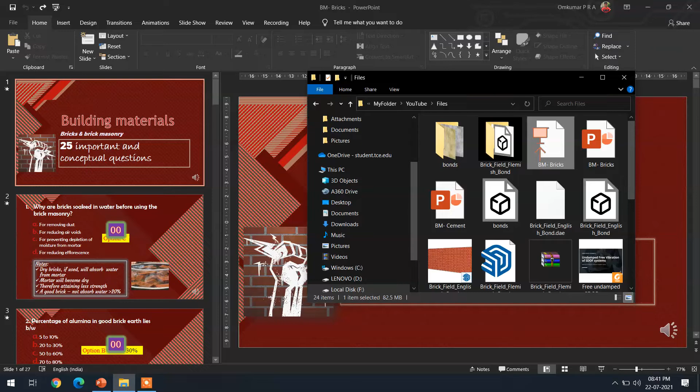Brick. Brick is a type of block that is used to build walls, pavements, and other elements in masonry construction. They are laid in courses or numerous patterns known as bonds, and collectively we call it brickwork. And they may be laid in various kinds of mortar like lime mortar, cement mortar, etc. to hold the bricks together to make a durable structure.

Now let's see some 25 important questions that will come under brick masonry, and those will be useful in various examinations. Now let's get into it. First question. Why are bricks soaked in water before using them in brick masonry? Usually the bricks are soaked in water for 24 hours. But why? What is the reason?

Our options are option A, for removing dust, option B, for reducing air voids, option C, for preventing depletion of moisture from mortar, option D, for reducing efflorescence. Just think for 10 seconds and give the correct answer.

Here we go. The correct option is option C. That is, for preventing depletion of moisture from mortar, we are soaking the bricks for about 24 hours before using them in brickwork or brick masonry work. Let's see some more points in this topic, efflorescence.

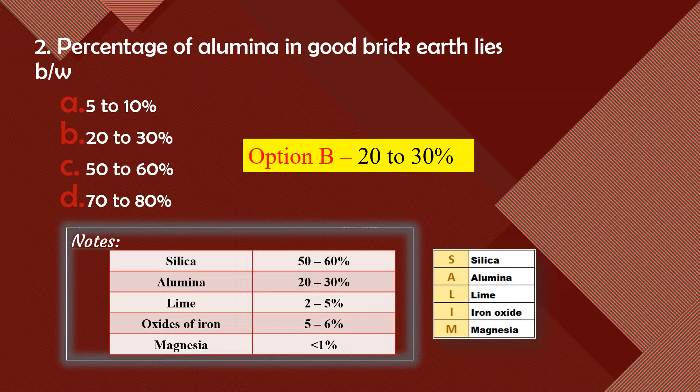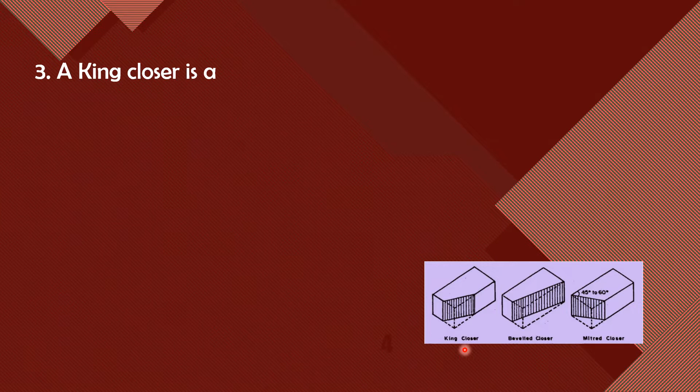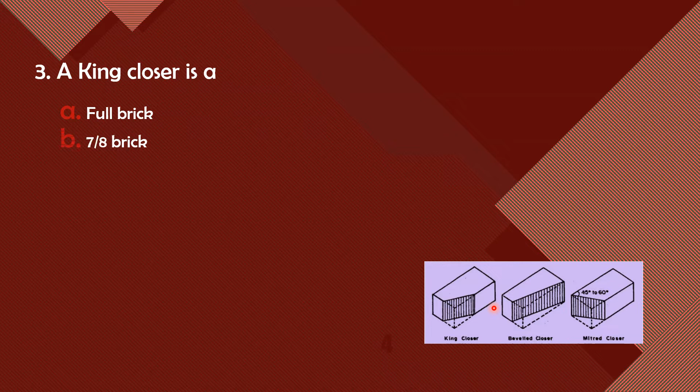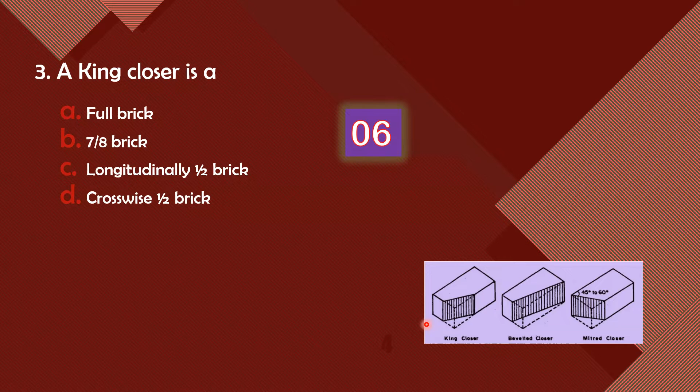The correct answer is option B, 7/8 of a brick. This is half of the header. This is half of the stretcher. If we remove this part, that will be around 1/8 of a brick. So how much is left? 7/8. A king closer is nothing but 7/8 of a brick.

Now let's see some more important points. A queen closer is nothing but a longitudinally half brick. So let's see the diagram. If this is the brick, what is the queen closure? It is the longitudinally half brick. And what is a half bat? This part is the half bat.

Others are mitered closer, bat, beveled closer. Here we can see the bevel closure. This is the mitered closure. This depends on the angle made with the stretcher end. So these are some of the closures we use in brick masonry or brickwork. Now let's move on to the fourth question.

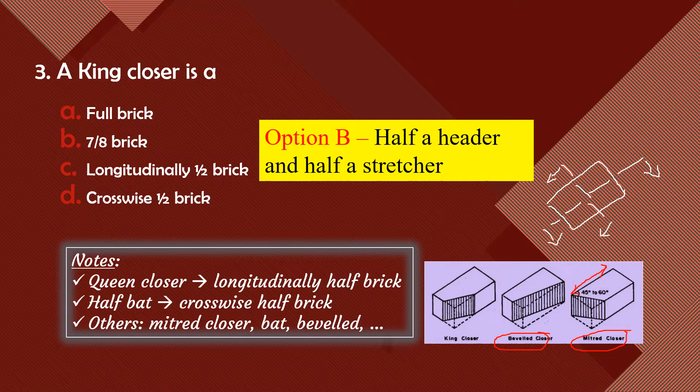At a T junction between a 1.5 brick wall and a one brick wall, one can use: option A, half queen closer in each course. What is the closure brick we have to use while using a T junction between a 1.5 brick wall and a one brick wall? Option B, half queen closer in every alternate course. Option C, 3/4 bat in each course. Option D, half bat in every alternate course.

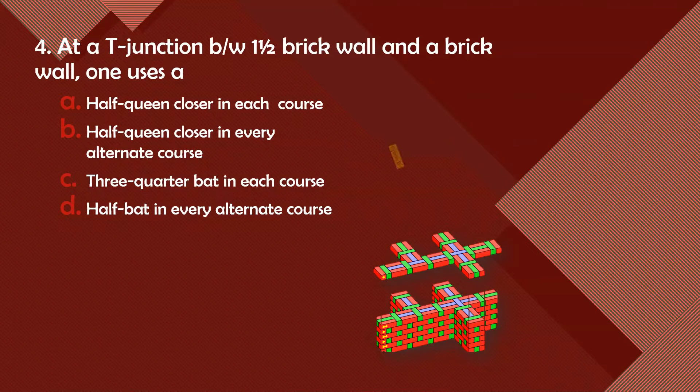We know what a half queen is, what a bat is, what a 3/4 bat is, and what a half bat is. Now guess the answer. Think for 10 seconds. Here we go. The correct option is option B, that is half queen closer in every alternate course. In every alternate course, that is this alternate one, this alternate one, this one. So for every alternate course, we have to use the queen closer. So this is the correct answer. Let's see some other points.

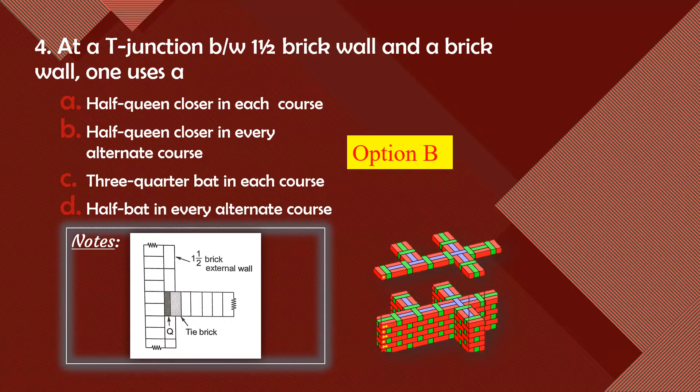Okay. Here is the diagram. You can visualize what is the half queen closer in every alternate course. So this is the half queen closer, and this is the T junction. This is the 1.5 brick wall, and this is the one brick wall. In a T junction between them, we are using a half queen closer in every alternate course. So this is how we can visualize it. Now let's move on to the fifth question.

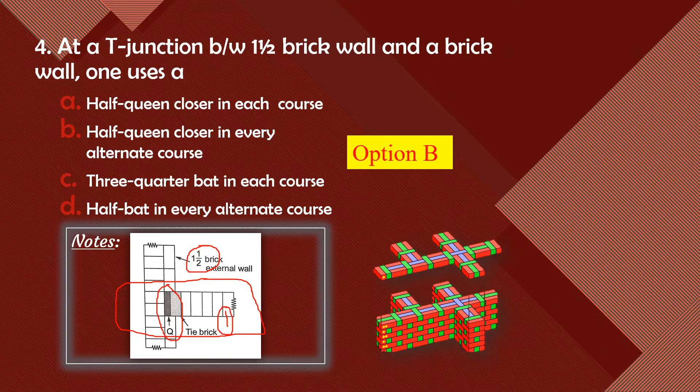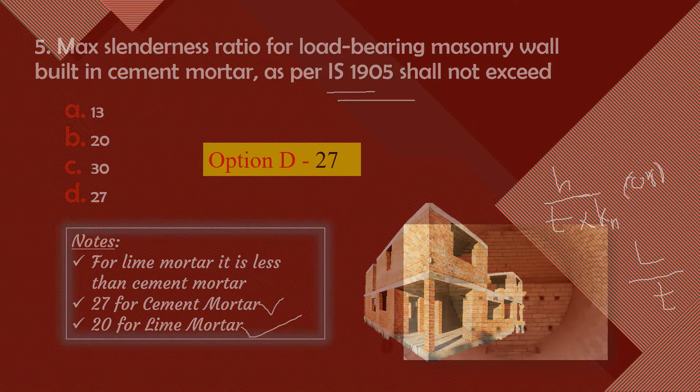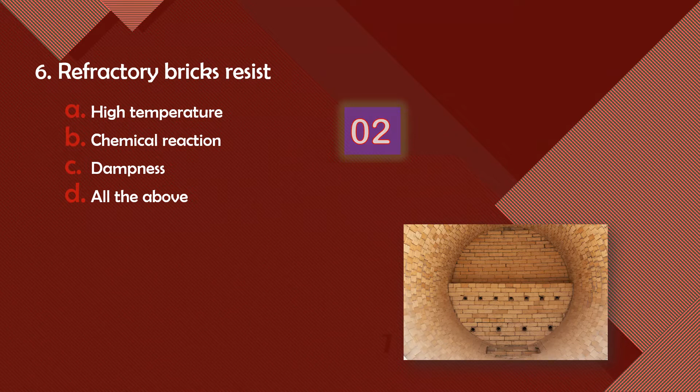Refractory bricks resist what? Option A high temperature, option B chemical reaction, option C dampness, option D all of the above. So what is a refractory brick? It is usually used in a kiln. Whenever a high amount of heat is there, we use refractory bricks. And what about chemical reaction and dampness? Just think about it for 10 seconds. What is the answer? The correct option is option D, all of the above. So refractory bricks can resist high temperature, chemical reaction, and dampness.

So we use refractory bricks in the lining of furnaces, where furnaces are subjected to very high temperature. Compressive strength of a refractory brick shall be 200 to 220 Newton per mm square, and the water absorption shall not be greater than 10%, around 5 to 10%, unlike ordinary brick. For ordinary brick it should be less than 20%, but for refractory bricks it shall be 5 to 10%.

Other types of refractory bricks are acid, basic, and neutral. So we are using three types of refractory bricks in the market. Chrome bricks resist the corrosive action of slags and gases; it is one type of refractory brick, useful to resist corrosive action of slags and gases. This is nothing but chrome bricks. Now let's see the seventh question.

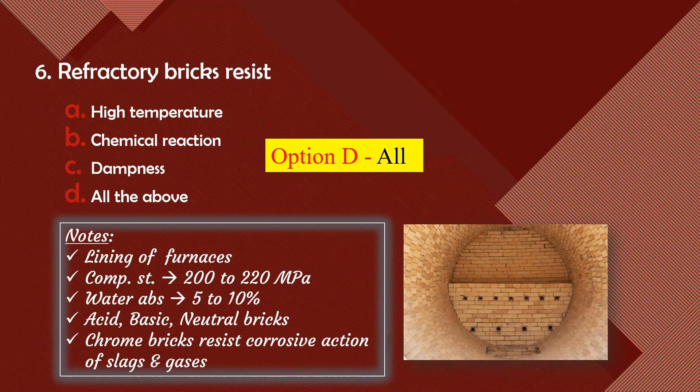In brick masonry, mortar strength should match brick strength, or mortar strength shall be greater than brick strength, or brick strength shall be greater than mortar strength, or it is independent of the strengths of both. Whichever is the answer. So what is the correct option?

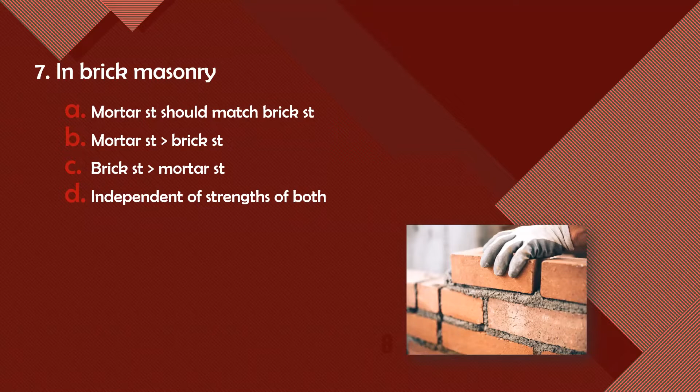The correct option is option A, equal strength. Why? Because it is ambiguous if we use mortar strength greater than brick strength or brick strength greater than mortar strength. There is no meaning of using variable strength; it should be optimum. That is, mortar strength shall be equal to brick strength. So both the strengths should be equal.

Units crush earlier than mortar. Whenever we use mortar strength greater than brick strength, the units of brick will crush earlier than mortar. Weak mortar means it will be a waste of money, because brick strength is already high, and if we use weak mortar, that will be a waste of money. So therefore, optimum strength, that is equal strength, has to be maintained in brick masonry. Now let's move on to the eighth question.

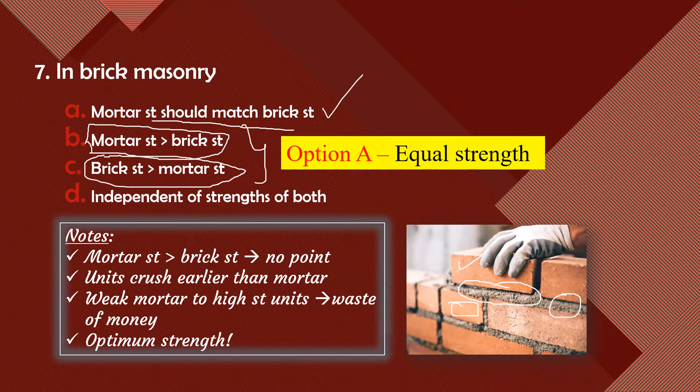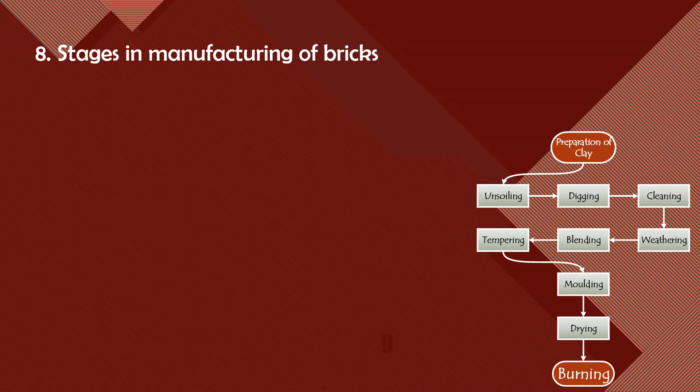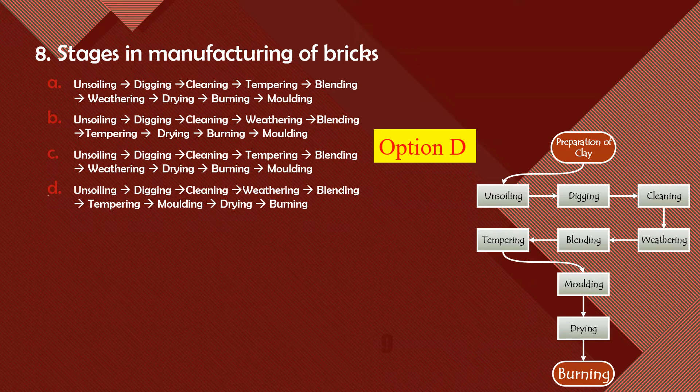Option D: unsoiling, digging, cleaning, and then weathering, blending, tempering, molding, drying. At the last, we have to burn. So you can refer to this flowchart as well. So what is the preliminary thing before preparing this brick? Topsoil of about 200 has to be removed because topsoil has some impurities. So we have to remove it for about 200 deep.

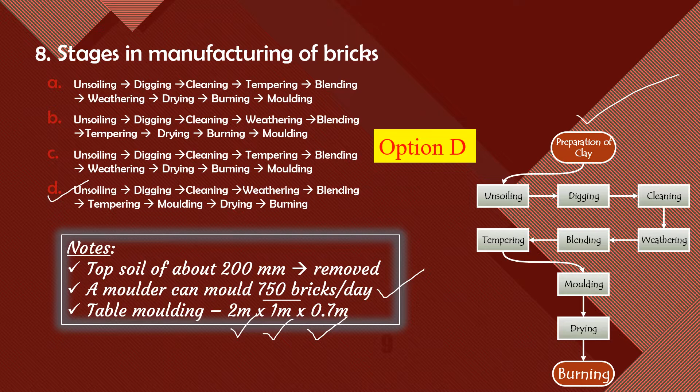A molder can mold 750 bricks per day. It is a general thing. In table molding, the size of the table is 2 meter across, 1 meter across, 0.7 meter. These are some general things we have to be aware of. So topsoil of about 200 has to be removed, a molder can mold 750 bricks per day, and table molding size is this. So these are the manufacturing stages involved in brick manufacture. Now let's move on to the ninth one.

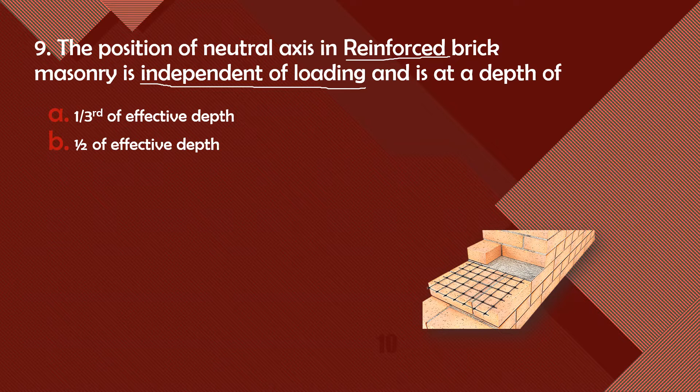The position of the neutral axis in reinforced brick masonry is independent of loading and is at a depth of. So the neutral axis position is independent of loading. They have given some information and we are supposed to answer the position of that neutral axis. Option A, 1/3 of effective depth, or half of effective depth, or full depth, or 0.707 times the effective depth. What is 0.707? It's nothing but 1 by root 2. So give the correct option.

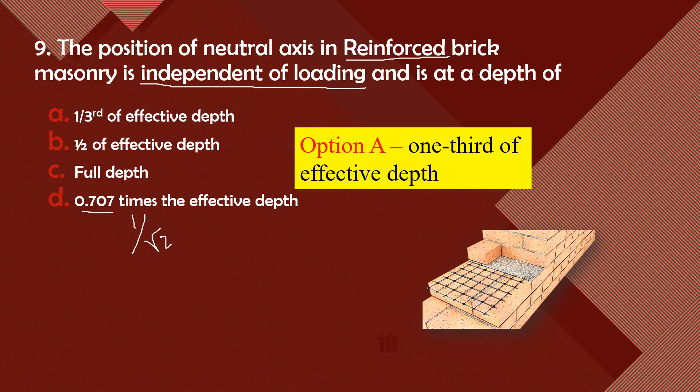The correct option is option A, that is 1/3 of the effective depth. What are the other things we have to learn? It should be capable of resisting compressive, shear as well as tensile stresses. For reinforced brickwork, it should resist both compressive stress and tensile stress because we are inducing steel between the brickwork. So it is expected to resist compression and tension.

Mortar cover of 15 centimeter to 25 centimeter shall be used. These are some provisions we have to adopt so that reinforced brick masonry is fully constructed. Reinforced brick masonry is cheaper than reinforced cement concrete, so it is cheaper than RCC. Higher ductility and stiffness, which is obvious because we are using steel as reinforcement. To achieve unusual shapes and bold patterns, we use reinforced brick masonry. Unusual shapes and bold patterns refers to ornamental or any shape we can achieve.

A plaster of minimum thickness 15 mm. So mortar thickness 15 centimeter to 25 centimeter, and plaster thickness shall be minimum 15 mm when using reinforced brick masonry, to avoid corrosion. Now let's move on to the 10th one.

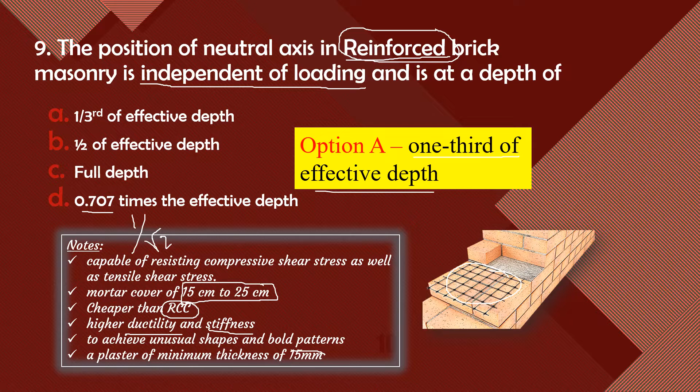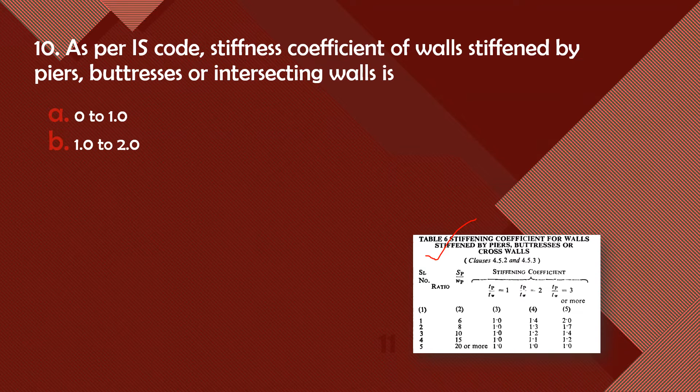10th question. As per IS code, the stiffness coefficient of walls stiffened by piers, buttresses or intersecting walls is. This is the table we can find in the IS code, and the question is based on this table. Refer to this table and give the correct option. Option A 0 to 1, option B 1 to 2, option C greater than 2, option D invariably 1.

So the correct option is option B, 1 to 2, because you can see here. So here is the 1, and maximum value 2 is here. So the stiffness coefficient of walls stiffened by these piers, buttresses or intersecting walls ranges from 1 to 2.

Now let's see some other important points. Stiffness coefficient depends on the ratio of center to center spacing of intersecting wall and pier width in the direction of wall. So this is how stiffness coefficient will vary. It also depends on ratio of thickness of pier to actual thickness of wall proper.

So what is the thickness of pier? It is denoted by TP. TP here. Here they have mentioned TP, and thickness of wall is TW. SP is the center to center spacing, and WP is pier width. Pier width we have seen here. So this is how stiffness coefficient varies. It ranges from 1 to 2. Now let's move on to the 11th question.

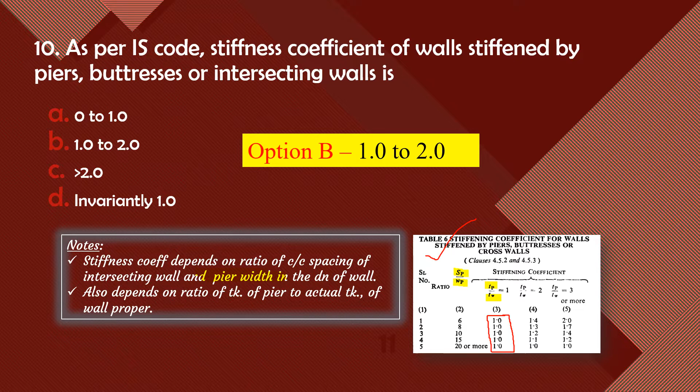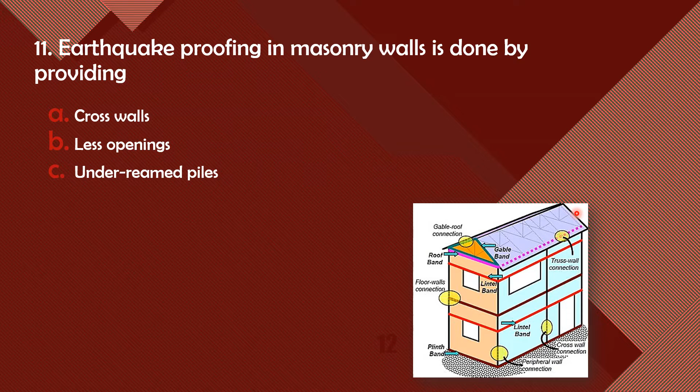Earthquake proofing in masonry walls is done by providing. So how are we providing earthquake proofing in a masonry wall? In this diagram, it's clearly mentioned how we have provided earthquake proofing in a masonry building. Option A, cross walls. Option B, less openings. Option C, by providing underreamed piles. Option D, by providing a steel band at corners above windows below ceiling. So refer to this diagram, you can get the answer.

So the option is D. You can see here, this is the lintel band. They have clearly mentioned here. So this is one of the steel bands that we provide to resist earthquake or lateral loads. We can provide shear wall as well to resist earthquake loadings, and a horizontal runner called band, that is the steel band at corners above the windows below the ceiling. We can consider this as a window, and this steel band, the lintel band, is constructed above this window but below the ceiling.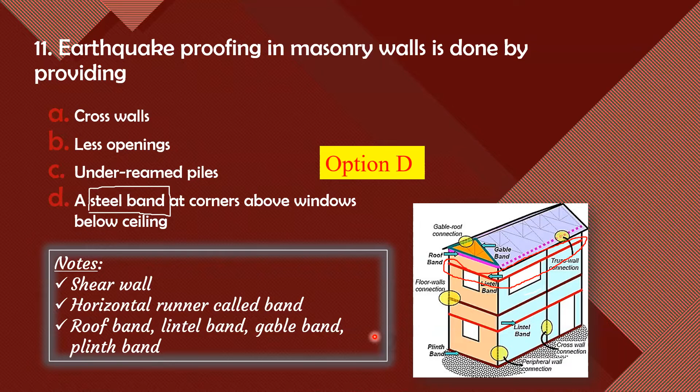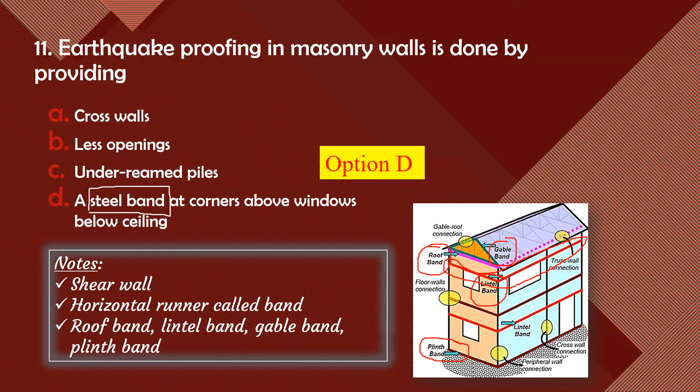And some other types of steel band are roof band and lintel band. Here you can see the roof band as well. This is the lintel band. This is the gable band. And plinth band near the plinth wall. So this is how we can tie up a building to resist earthquake loading, or we can say lateral loadings. Now let's move on to the 12th question.

The 12th question is, which type of brick masonry bond is provided for heavy loads in masonry? There are many types of bonds like English bond, Flemish bond, double Flemish, single Flemish, and so on. Which is that bond to take care of heavy loads? Option A, English bond. Option B, zigzag bond. Option C, single Flemish. Option D, double Flemish. Your time starts now.

So the correct answer is English bond. English bond is the one which is used to resist heavy loads. And we can see the functions of other types of bonds. English is the strongest bond. Double Flemish is used for aesthetic appearance.

Single Flemish strength will be the same as that of English bond, and appearance shall be the same as that of double Flemish bond. So with single Flemish bond we can achieve two things. But the strongest is the English bond; we cannot say single Flemish bond is the strongest one. Zigzag bonding is used for ornamental panels in brick flooring. Now let's move on to the 13th one.

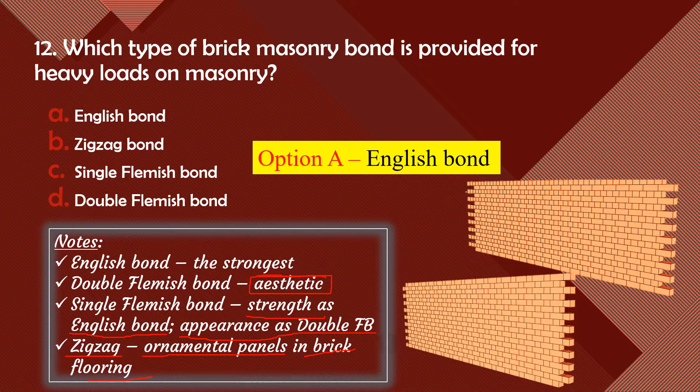When the deposit of efflorescence is greater than 10 percent but less than 50 percent of the exposed area of the brick, then it can be said as: option A, moderate, option B, heavy, option C, slight, option D, serious. What can we name that range of efflorescence?

So the answer is moderate. If the efflorescence deposit lies between 10 percent and 50 percent, we can call that efflorescence moderate. So when can we say an efflorescence is slight or heavy or serious? Let's see. We can say an efflorescence deposit is slight when it is less than 10 percent. We can say heavy or high when it is greater than 50 percent, and serious when greater than 50 percent and it causes powdering or flaking of the exposed surface.

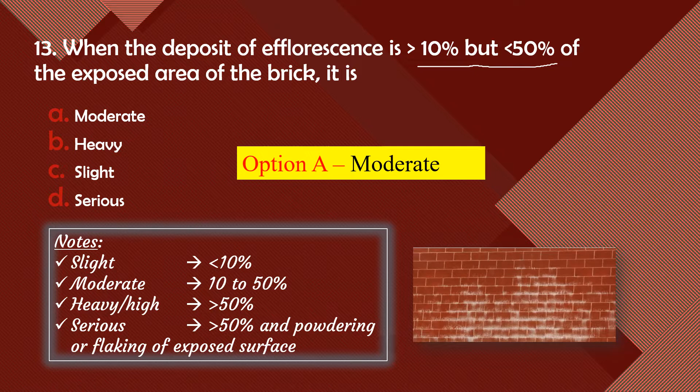The function of coping is to serve as a... So this is the coping. You can see here. So what function is it serving? Option A, ornamental courses between lintel level and roof level. Option B, projection from a wall to support a structural member. Option C, covering to wall to drain water. Option D, shade against sun or solar radiation. What is the correct option? What is the correct function which the coping is serving?

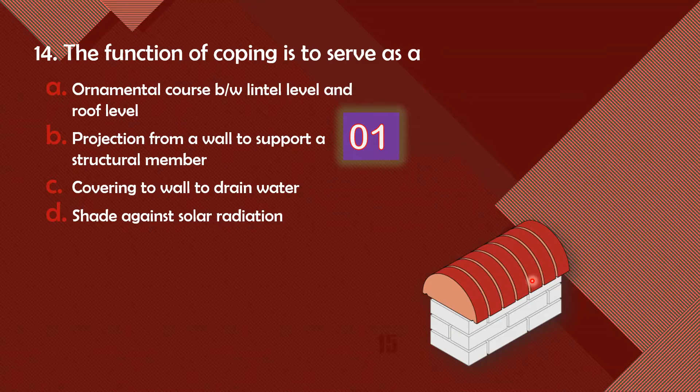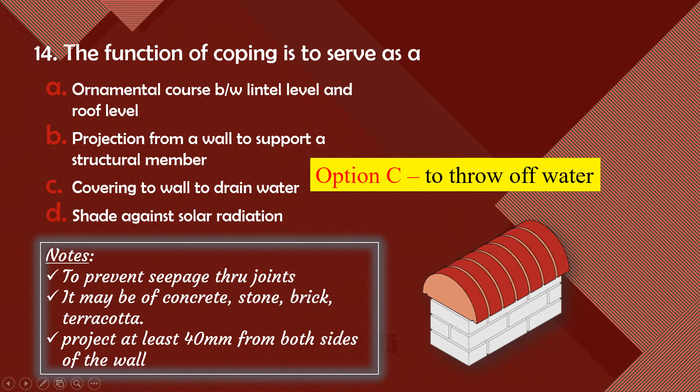Here we go. The correct option is C. To throw off water, that is to drain water, we are using coping. Its special function is to prevent seepage through joints. So this is the joint we can consider. So to drain off water and prevent seepage, we are using this coping. It may be of concrete, or it can be of stone, brick, or terracotta materials.

It should project. This is the projection. That projection shall be at least 40 mm on both sides of the wall. So this is the coping function: to drain the water and to prevent seepage through joints. Now let's move on to the 15th question.

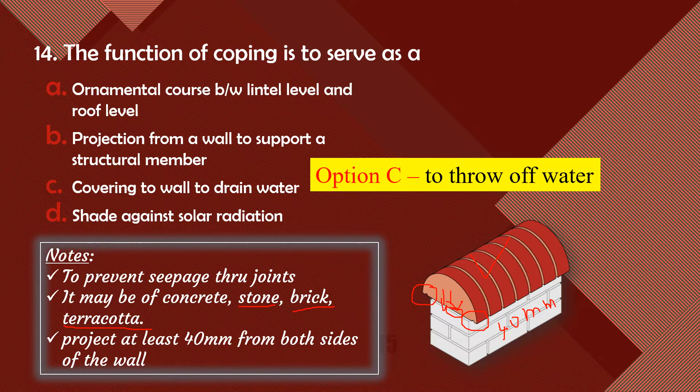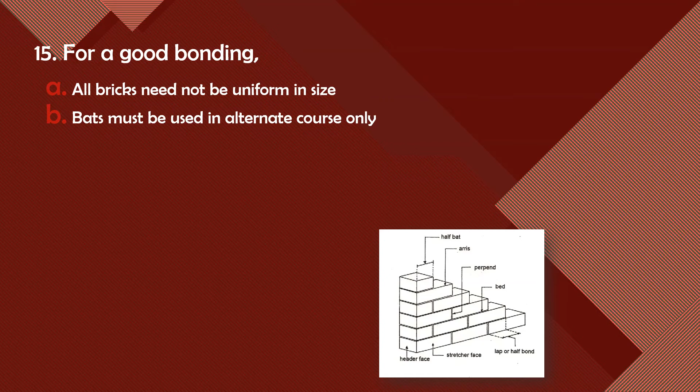For a good bonding, what is the criteria? All bricks need not be of uniform size. Bats must be used in alternate courses only. The vertical joints in alternate courses should fall in plumb. Cement mortar used must have surkhi as additive. So what is the correct option you think for a good bonding?

So the correct option is option C, that is, vertical joints in alternate courses should fall in plumb. So what are the other things for a good bonding? We shall see now. A lap should be 1/4 brick along the length of wall and half brick across the thickness of wall. These are some points we have to consider for a good bonding of brickwork.

And bricks should be uniform in size. There should be no variation in size of the bricks used in a wall construction. Stretchers are used in the facing only, not in any other place. Bats have to be used only under special circumstances because a bat has less strength and bonding will be weaker, so it has to be used only for special circumstances. Instead we can use king closer, queen closer, like that.

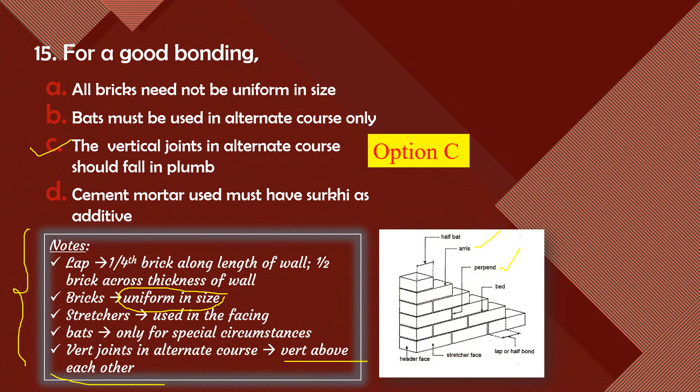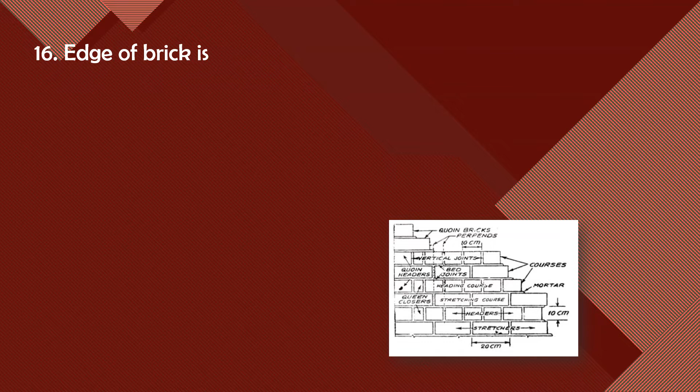Edge of a brick is... If you observe that diagram in the 15th question, you can answer this in a flash. Option A, arris. Option B, splay. Option C, quoin. Option D, perpend. Your time starts now.

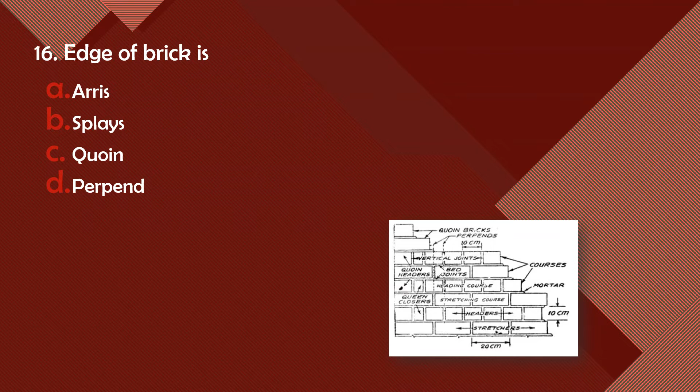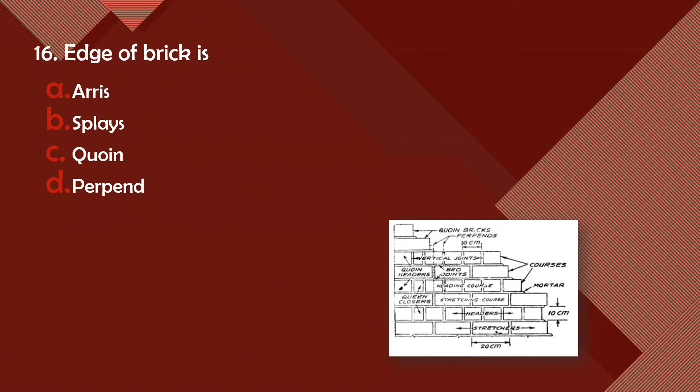So the answer is arris. Arris is nothing but the edge of a brick. What are the other terms in a brick? Splay is nothing but plinth. Plinth of a wall, we call it splay. What is quoin? Quoins are corners, and these are mostly placed at right angles, 90°, but can be placed at more than 90° also.

What is a frog? Frogs are nothing but an impression or indentation produced in the top of the brick. The frog is absent in wire cut bricks, two frogs are made in pressed bricks, and only one frog is provided in handmade bricks.

So these are the considerations for frogs. What is racking back? Racking back is nothing but termination of wall in stepped fashion. Whenever a wall is terminated in a stepped fashion like this, we call it as racking back. Some other terms are toothing, perpend. Perpend is nothing but, we can see in the last picture, that is perpend is like this appearance we can see. This is the perpend one.

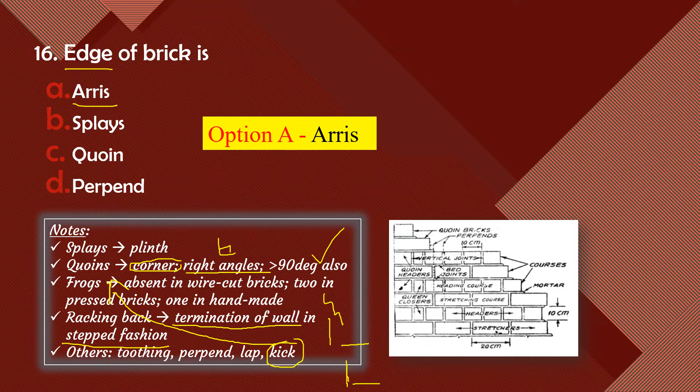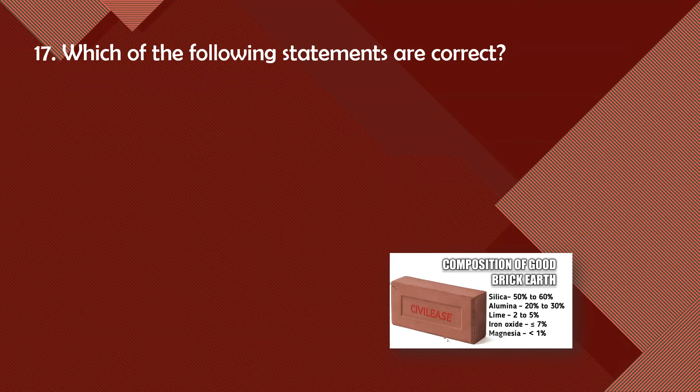Which of the following statements are correct regarding the composition of good brick earth? About 25% of alumina in brick earth imparts the plasticity necessary for molding bricks. Option B, iron pyrite preserves the form of the bricks at high temperature. Option C, presence of weeds makes the bricks unsound. Option D, both option A and C. Which is the correct option?

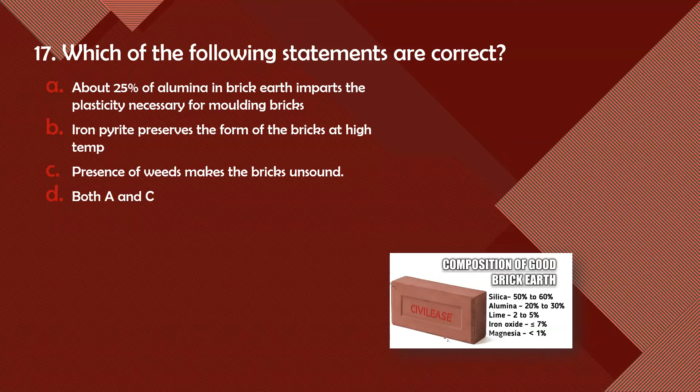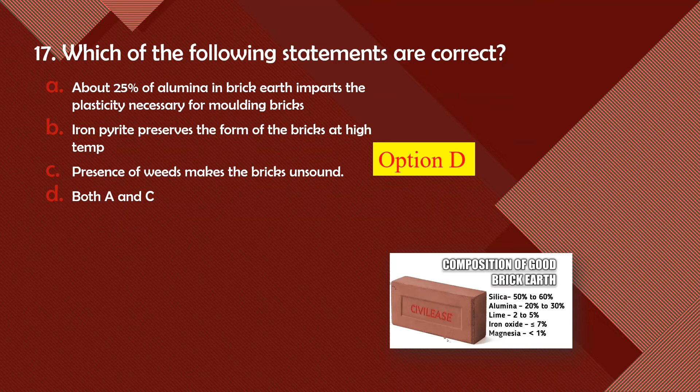So the answer is both option A and C. So about 25% of alumina in brick earth imparts the plasticity necessary for molding bricks. Whenever we knead the brick and mold in a mold pattern, we need at least about 25% of alumina, which is used to impart plasticity so that we can mold in a required shape. Presence of weeds makes the bricks unsound, meaning weed is nothing but some vegetation. So presence of those vegetation or organic materials will make a brick unsound.

What are the other components and their functions? Silica. Silica imparts uniform shape. Silica is nothing but sand only, right? It imparts the uniform shape. Iron pyrite. Iron pyrite will cause disintegration during burning. So iron pyrite must be negligible in percentage. Vegetation will cause porous bricks and evolution of some gases involved in the reaction. Alumina imparts plasticity as we have seen. Lime gives lower fusion temperature so that it prevents shrinkage. So these are some important components and their functions.

Now let's move on to 18th question. And before moving on to 18th question, let's see this diagram. We have already seen the percentage of the components or composition of good brick earth in previous question. Just revise it now. Silica 50 to 60 percentage, alumina 20 to 30, lime 2 to 5, iron oxide less than 7, magnesia less than 1. Now let's move on to 18th question.

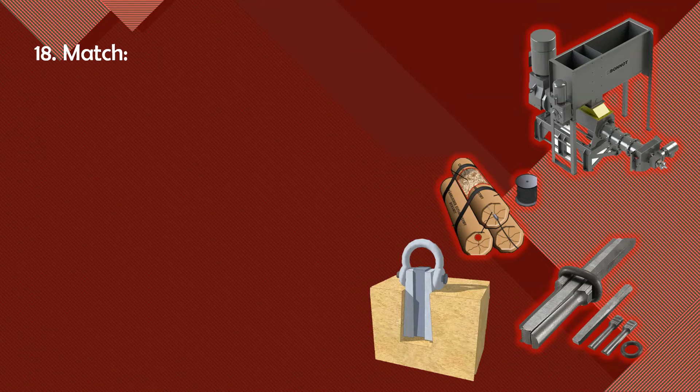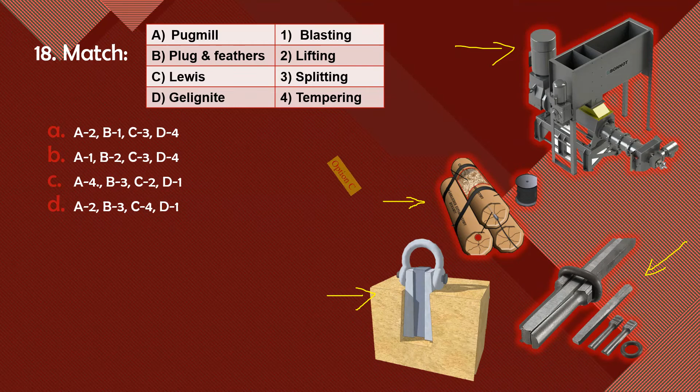So the correct option is option C, that is 4321. That is in a reverse order. Pug mill is used for tempering. What is pug mill doing? It is kneading the brick earth material and then tempering into a perfect composition and giving a shape. Plug and feathers has some function, that is splitting.

So splitting the brick, or we can say breaking the brick into parts so that we can fetch the bat, quoin, etc. Bat and quoin, those brick parts we can get from this plug and feathers. What is lewis? Lewis is the lifting material. So in order to lift some heavy bricks, we are using this component called lewis. Gelignite is nothing but blasting material. It is like dynamite. Dynamite causes blasting only, but it is different from gelignite. Gelignite is used for blasting purposes in brick manufacture.

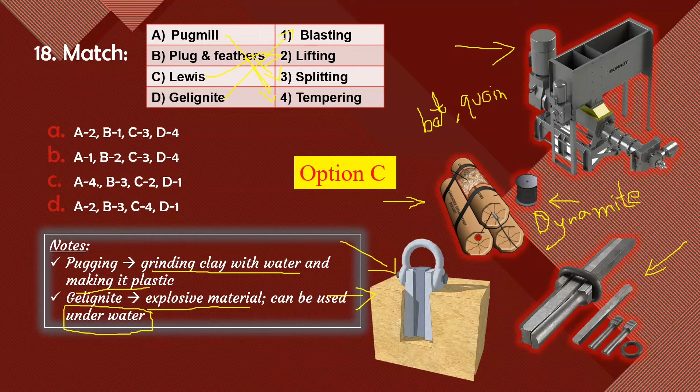Now let's see some more important points. Pugging means nothing but grinding clay with water and making it plastic so that we can temper. Gelignite is an explosive material. It can be used underwater, which is the specific reason to use gelignite. We cannot use dynamite underwater. So option is C, that is pug mill, tempering. Plug and feathers, splitting. Lewis, lifting, and gelignite, blasting. Now let's move on to 19th one.

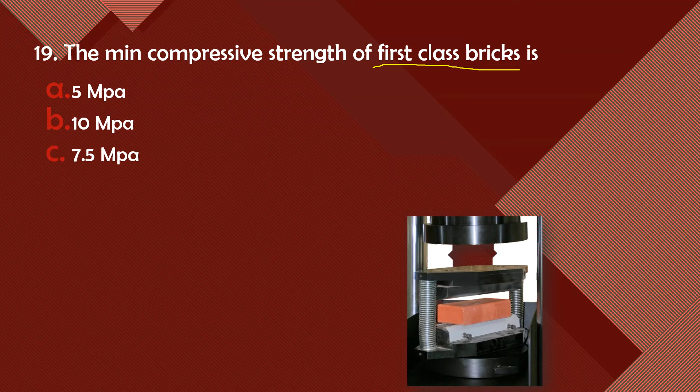Minimum compressive strength of first class brick. It's a basic and important question we have to be aware of. Option A, 5 megapascal or Newton per mm square. Option B, 10. Option C, 7.5. Option D, 9 Newton per mm square.

So the correct option is 10 Newton per mm square for first class brick. And what is the case when we use second class brick and third class brick? For second class, it shall be greater than 7.5 Newton per mm square. For third class brick, it shall be 3.5. So 7.5, 3.5. How do we have to test for compression?

Place the specimen with flat faces horizontal. This is the flat face, and it shall be kept horizontal, and mortar filled face facing upwards. If at all we are using mortar, that has to be facing upwards between plates of testing machine. So between the plates of testing machine, what is the rate of load? We have to give 14 Newton per mm square. It's the rate of loading we have to give in a compressive testing machine.

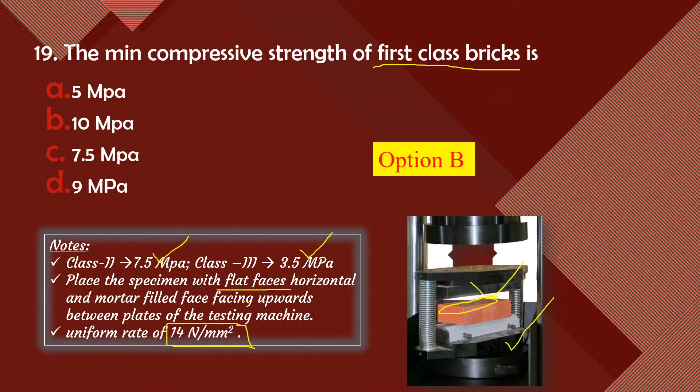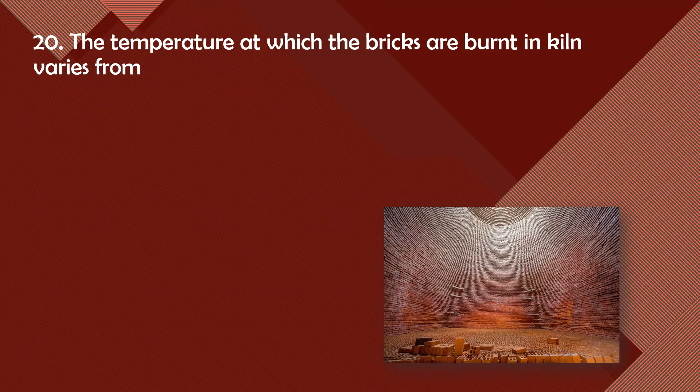Now let's move on to 20th one. The temperature at which the bricks are burnt in kiln varies from. So kiln is a mechanical device in which we are burning a brick at high temperature. To resist that high temperature, we are using refractory bricks, as we have seen in previous question. Now let's see the options: 500 to 800 degrees Celsius, 800 to 1000 degrees Celsius, 1000 to 1200 degrees Celsius, or 1200 to 1500 degrees Celsius. Which is the correct one?

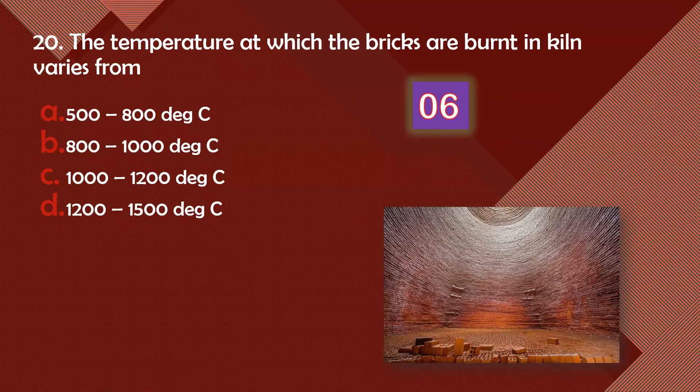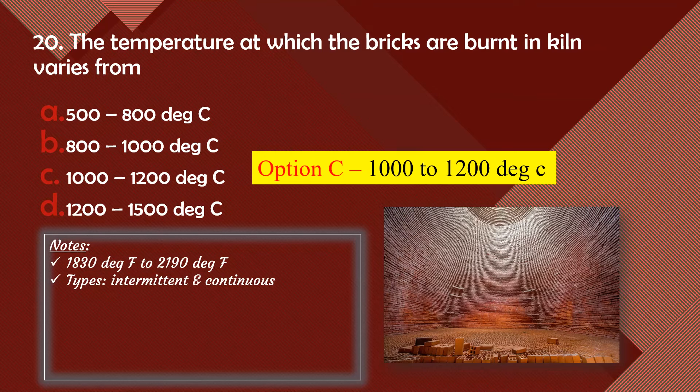So the option is option C, 1000 to 1200 degrees Celsius, the temperature at which the bricks are burnt, or in degree Fahrenheit 1830 to 2190. There are two types of brick kilns: intermittent and continuous, and they also have some branches. In intermittent kilns, we have without chimney and with chimney. In continuous, there are moving fire kilns, moving ware kilns, and among these we have other types: clamp, scotch, down draught, climbing, Hoffman kilns.

What is a Hoffman kiln? Hoffman kiln is a moving fire kiln, and it is continuous. Hoffman kiln is the continuous kiln. Fixed chimney Bull's trench. Bull's trench is also continuous and moving fire. So these two are some specific kilns we can expect in an objective type question. Now let's move on to 21.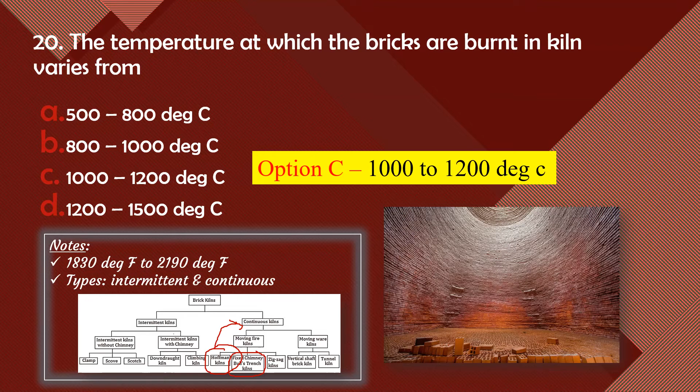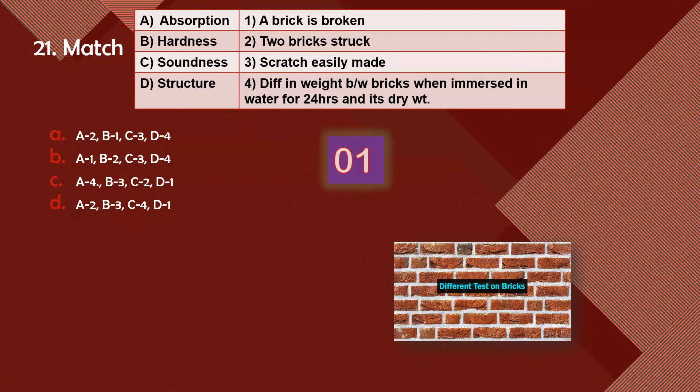It is based on different tests on bricks. Match the following. Absorption, hardness, soundness, and structure have to be matched with this column. Option A, option B, option C, option D. What is the correct option? You can see column 1 with respect to column 2 and identify the answer. Correct option is option C, A4, B3, C2, D1.

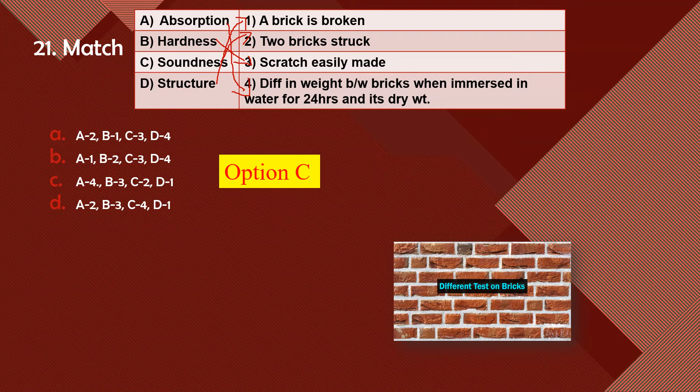Absorption is a test which we do in this manner: difference in weight between bricks when immersed in water for 24 hours and its dry weight. For hardness, we scratch the bricks to see whether any indentation occurs or not. Soundness is a ringing sound when two bricks are struck. Structure is how far the composition is controlled in a brick. So a brick is broken and we can test the brick.

Some other points to study the correctness of a brick. The standard size shall be 19 cross 9 cross 9 centimeter. The traditional size we are using in India is 9-inch cross 4.5-inch cross 3-inch. The color of brick has to be bright and uniform. It should not be dark, overburnt or underburnt. It should be alkali free so that there is no efflorescence. So these are some different tests on bricks. Now let's move on to 22.

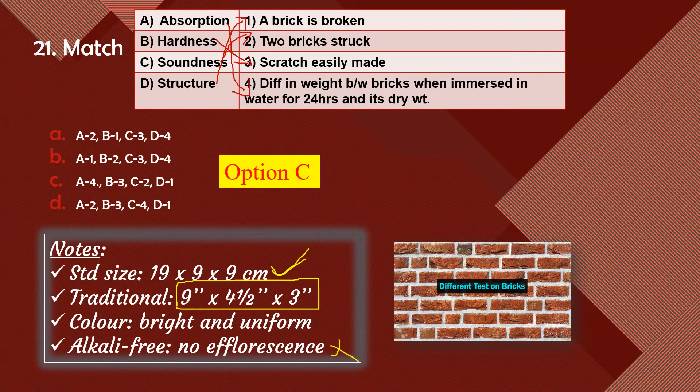For ornamental work, types of bricks preferred are option A, silica bricks, option B, silica lime bricks, option C, bricks made in autoclave, option D, A and C. What is the correct option? So the answer is option D, both silica bricks and bricks made in the autoclave method.

For ornamental work means building facades; like this diagram, on the face or elevation of the building we can use ornamental type of bricks. What is a blue brick? Blue brick is a brick used in heavy constructions like bridges. Blue brick will be blue in color, like this.

Perforated brick shall be used in multi-story framework because perforated brick is light weight. So these are some types of bricks we are using. For ornamental work, we can use either silica bricks or bricks made in autoclave method. Now let's move on to 23.

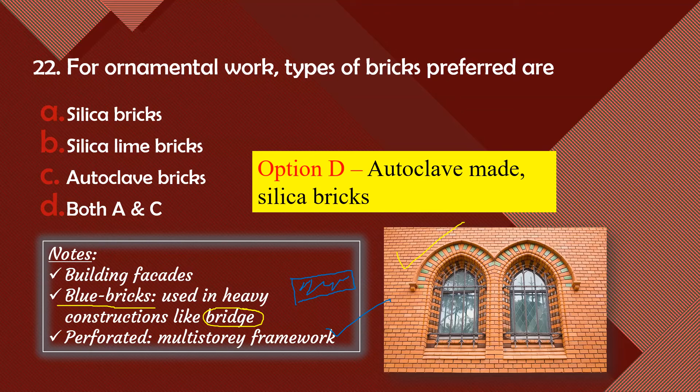Modular bricks are of nominal size 20 cross 10 cross 10 centimeter. This question is something like a problem-and-solve question, and 20% of volume is lost in mortar. So nominal size they have given and volume lost in mortar they have given as 20%. Then what is the number of bricks required per cubic meter of brickwork? We have to calculate some of the things to achieve the answer, the number of bricks required per

cubic meter. Just think for 10 seconds and give the correct option. Option A 520 number of bricks, option B 500, option C 485, option D 470. It's a small calculation we have to do so that we can get the required number of bricks per meter cube.

So number of bricks required for this question is 470. How is it arrived? Let's see that. Actual size of brick is 19 cross 9 cross 9 centimeter, that we have already seen. Mortar required per meter cube is calculated as 0.2305. How is it calculated? 1 minus the actual size divided by nominal size. If we calculate this, we can get 0.2305 meter cube as mortar required per meter cube.

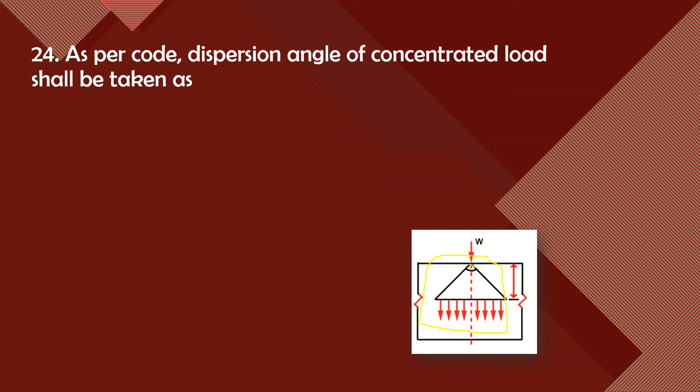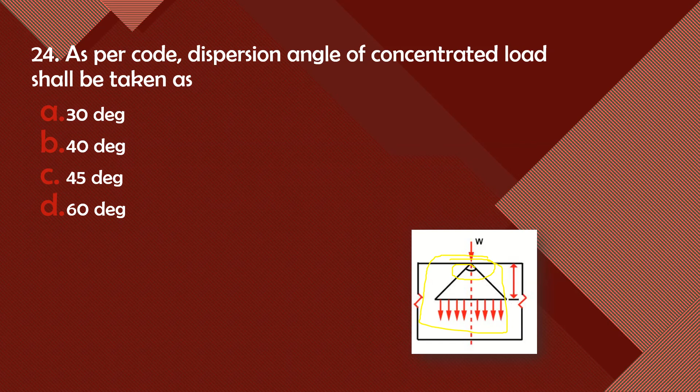Now let's move on to the 24th question. As per IS code, dispersion angle of concentrated load shall be taken as? So this is the dispersion angle. What angle has to be taken in brickwork or brick masonry? Option A 30 degrees, option B 40 degrees, option C 45 degrees, option D 60 degrees. Your time starts now.

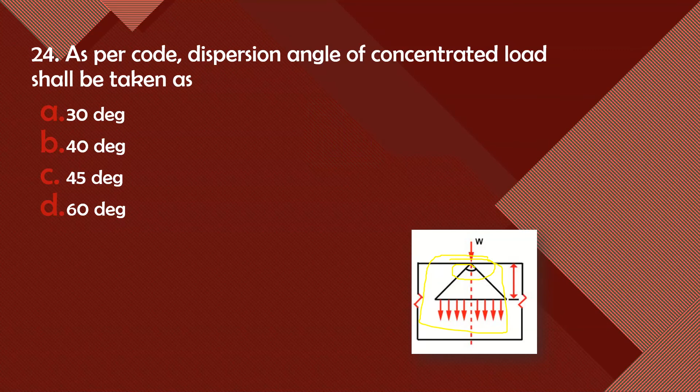Correct option is option A, 30 degrees. I think you may have guessed 45 degrees as the answer, but this is not correct, because in general or in practical cases this comes around 30 degrees only. 45 degrees is meant for foundation dispersion only. In brick masonry, the dispersion angle is 30 degrees as per the IS code.

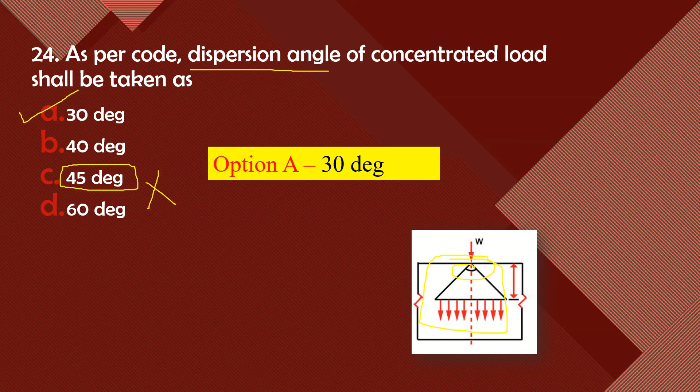The angle of distribution for axial loads not exceeding 30 degrees is more realistic. So we are adopting a 30-degree angle of dispersion of a concentrated load for masonry calculation, masonry construction.

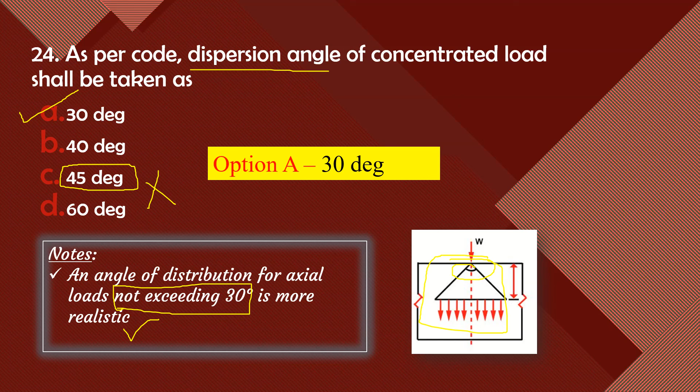Now let's move on to the last question, 25. Average weight of a brick. It's the simplest question of all. Option A 4 to 5 kg, option B 2 to 3 kg, option C 3 to 3.5 kg, option D 4 to 4.5 kg. What is the correct one? Your time starts now.

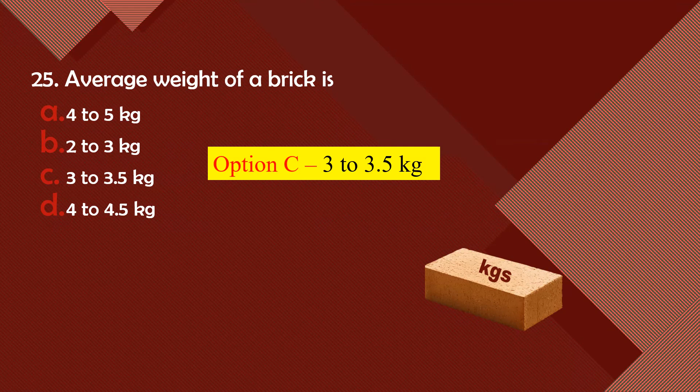So the average weight of a brick is 3 to 3.5 kg. So how is it arrived? Because a meter cube of brick earth weighs 1800 kg. So if 1 meter cube of brick earth weighs 1800 kg, one brick will weigh how much? 3 to 3.5 kg, because a brick has an actual size of 19 cross 9 cross 9 centimeter. By using that size, we can arrive at the average weight of a brick as 3 to 3.5 kg. Now this is the last question.